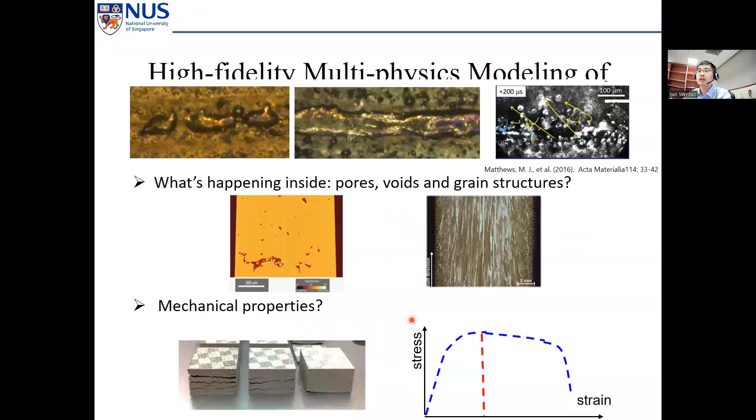The questions we want to answer through multi-physics modeling include what's happening outside, like powder motion and surface roughness, and what's happening inside, like pores, voids, and grain structures, and ultimately, what are the mechanical properties.

Correspondingly, we have developed a series of models, like multi-scale modeling of melting processes, powder dynamics models, grain evolution models, and then we integrated the process structure property models together. Our contributions lie in developing a complete simulation chain of manufacturing, microstructure, property relationships.

The focus today will be on the molten pool dynamics model, including how it's linked with the DEM model of powder spreading, the physics-based heat source models, the composition-dependent evaporation model, effects of external magnetic field, effect of ultrasound, and also I will talk a little bit about the multi-material melting model.

I will also talk about our work on microstructure evolution models from grain growth to dendrite growth, and also multi-scale thermal stress models from meso-scale to microscale.

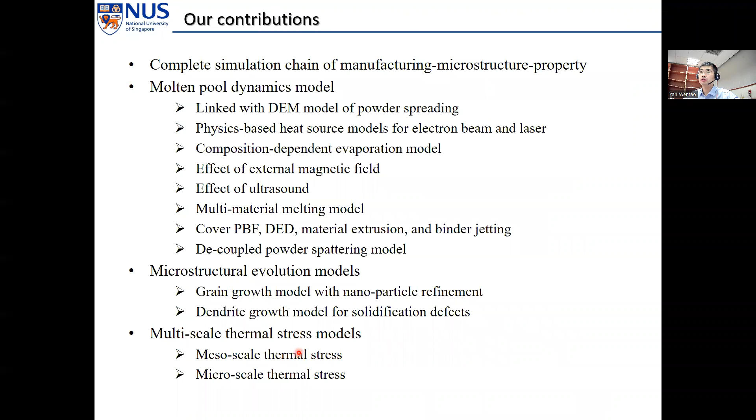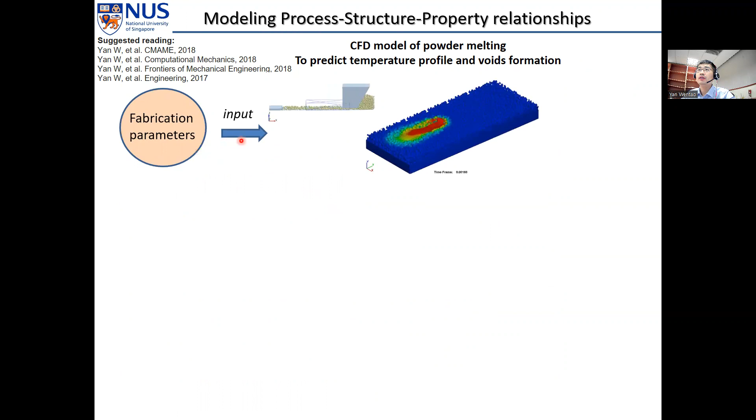The overall framework is like this. When we get the fabrication parameters, we use the powder spreading model and powder melting model to simulate the manufacturing process so that we can predict the temperature profile and void formation.

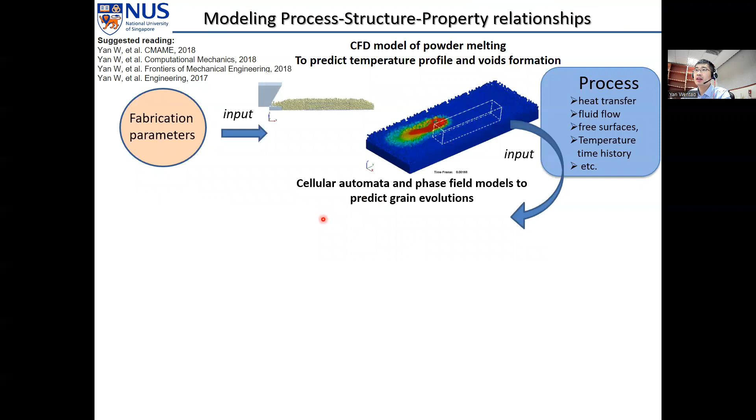Then we input into the cellular automaton and phase field models to predict microstructure evolutions. Further, we can use the crystal plasticity model to predict the mechanical properties and thermal stresses.

With that, we can replace most of the trial and error experiments and accelerate the R&D process.

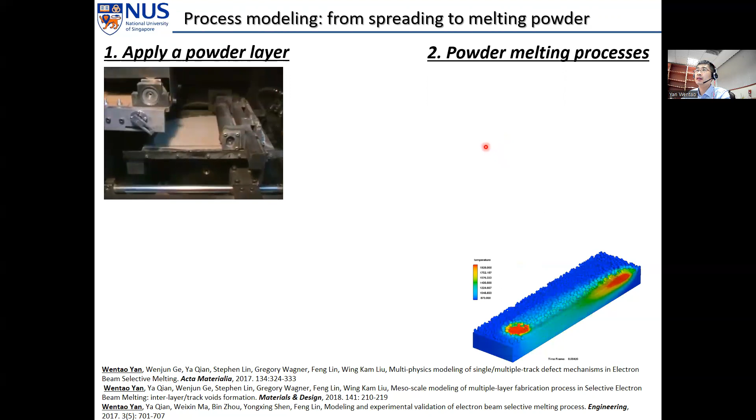For the manufacturing process, there are two major procedures. First is applying a powder layer, second is the powder melting process. Correspondingly, we built two models for powder spreading using the discrete element method and powder melting using computational fluid dynamics.

In the powder spreading model, we include elastic and inelastic collisions, friction, gravity, and also van der Waals force, and we can investigate the influence of the rake shape, speed, layer thickness, and powder size distribution.

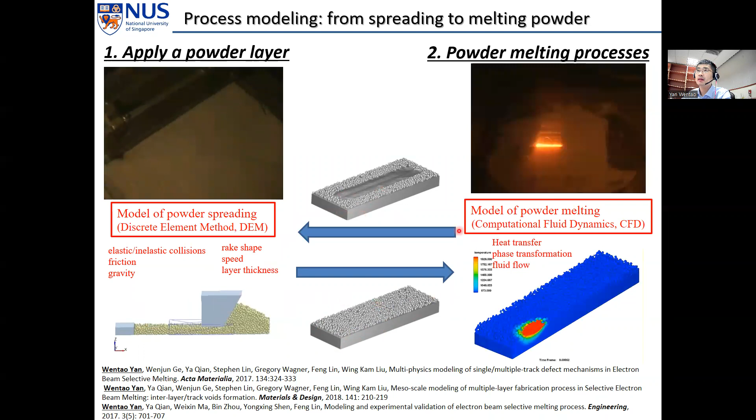With this model, we can get the configuration of the powder bed and implement it into the powder melting model to simulate the powder melting process, which can simulate the solidified geometry. Then we repeat these processes by coupling these two models together, reproducing what's going on in the real experiments.

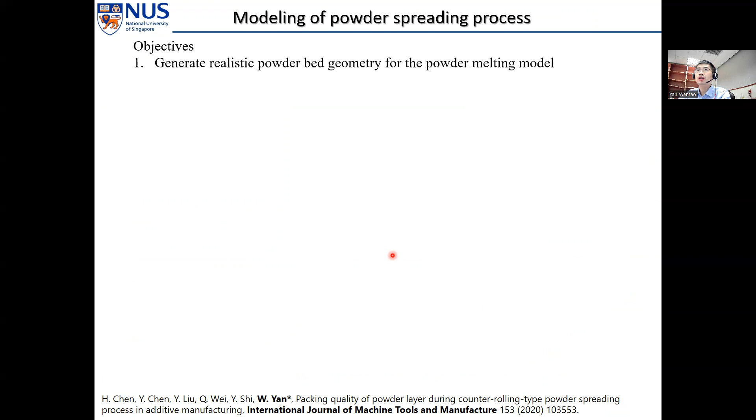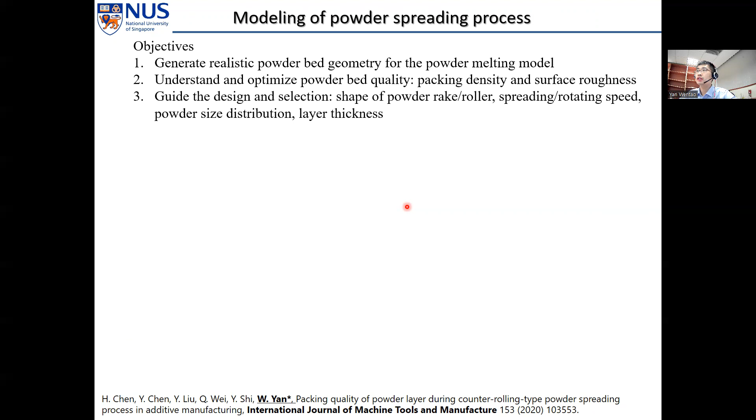For the powder spreading model, in addition to generating realistic powder bed geometry, we can also use this model to better understand and optimize the powder bed quality, like packing density and surface roughness, and provide guidance for the design and selection of parameters, like the shape of the powder rake or roller, spreading or rotating speed, powder size distribution, and layer thickness.

There are mainly two types of powder spreading machines. The first is rake type, where the rake translates over the powder bed. Another is roller type powder spreading, where the roller is rotating and translating. We have done extensive experiments to validate these models.

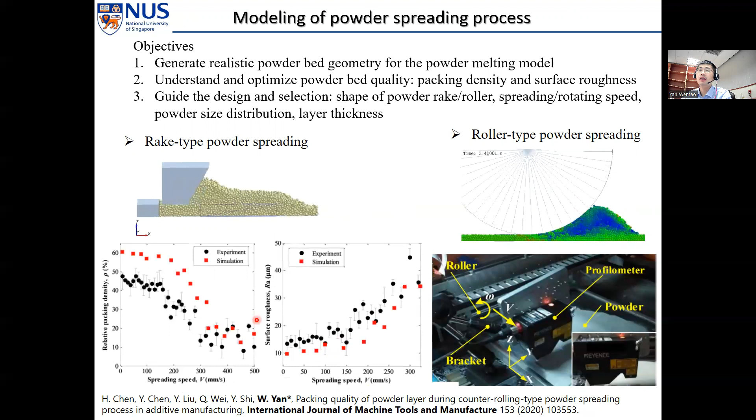For the roller type powder spreading, we add a profilometer here so that after powder spreading, we can in situ measure the surface configuration of the powder bed to evaluate the surface roughness. After this process, we can collect the powder and measure the relative packing density of the powder bed, and then do quantitative comparison with the simulation.

For the powder melting model, another very important factor is the heat source. Traditionally, a lot of heat source models are based on assumptions and simplifications, but here, to improve the accuracy and fidelity, we get this heat source model directly from fundamental physics.

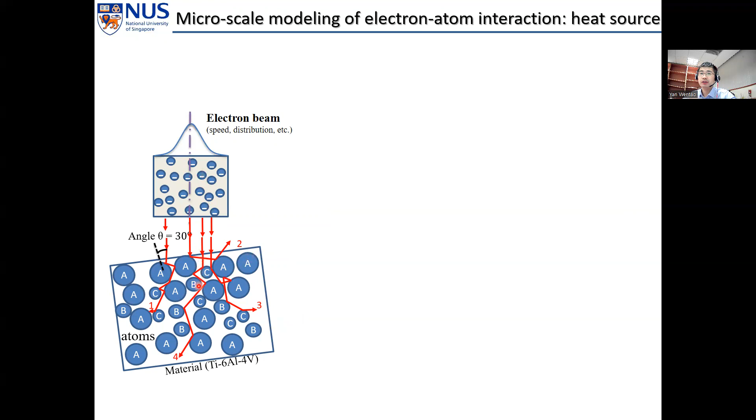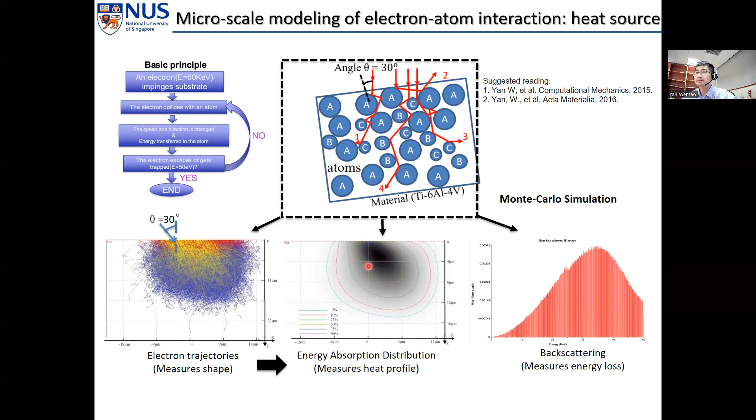For electron beam, it's the interaction between free electrons and material atoms. We use the Monte Carlo method to simulate millions of free electrons impinging into the materials and colliding with different atoms. During the process, we check the trajectories of the free electrons and also record the energy transfer between them, so that we can get a physically informed heat source model, including the distribution in the cross-section, the energy distribution along the penetration depth, and the energy absorptivity.

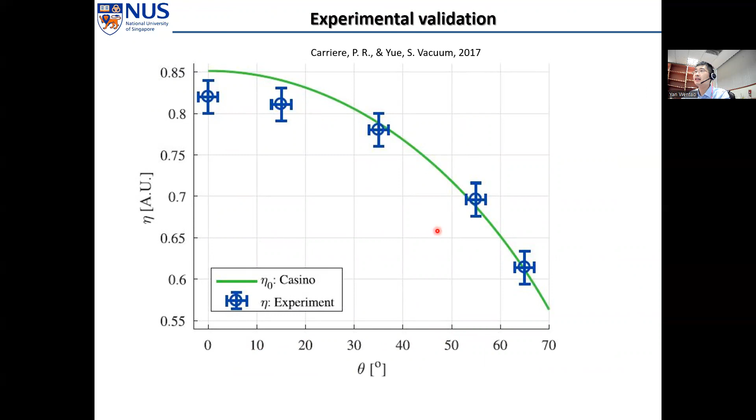One group in Canada used the same model as us and did some experimental validation. You can see at different incidence angles, the energy absorptivity is very close to the simulation, which demonstrates the validity of the model. The next question is how to do multi-scale modeling by implementing the micro-scale simulation into meso-scale or powder-scale simulation for the powder melting process.

First, in the powder melting process, we reconstruct the free surfaces based on the VOF method, and then we apply our heat source model by dividing the electron beam into a number of sub-beams with varied energy. For each sub-beam, the penetration starts from the surface, and the energy absorptivity is different for different sub-beams depending on the incidence angle.

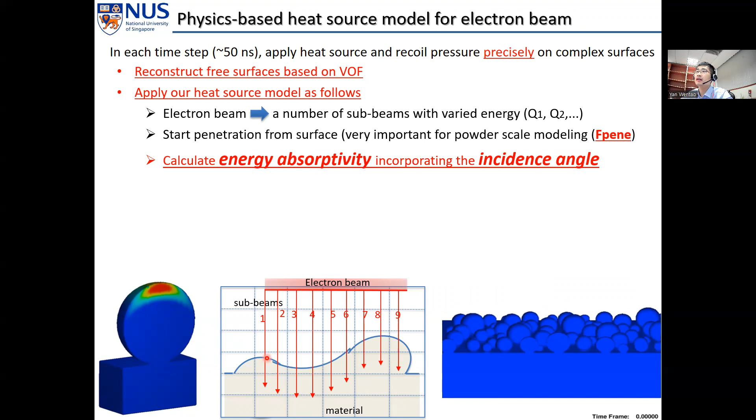And also the energy distribution along the penetration distance is applied based on the micro-scale model. We can also apply recoil pressure and evaporation on the reconstructed surface, which is temperature dependent and composition dependent. After this, we update the free surface at the end of each time step.

So this is a showcase. We assume it's a uniform distribution in the cross-section of the electron beam, incidence on the spherical particle. You can see the incidence angle is 0 here in the center and becomes larger and larger toward the edges. So the energy absorptivity is highest in the center and becomes lower and lower toward the edges.

That's the reason why the particle gets melted in the center first and then the edges. And for commonly seen Gaussian distributed electron beams, if the power is high enough, the recoil pressure will be dominant, so that you can see keyhole formation.

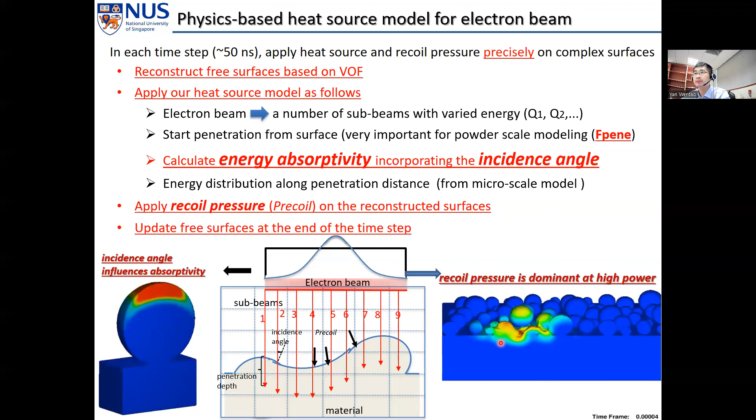And for laser, the heat source will be totally different, because for laser there will be multiple reflection since the energy absorption for each interaction is much lower. So we consider this heat source model using the ray tracing method to track the multiple reflection.

For each reflection, the energy absorptivity is calculated based on the Fresnel equation, which is essentially derived from the Maxwell equation. We can consider the energy absorptivity for different materials with different wavelengths and polarization, and the influence of incident angle is also considered.

And this is a verification case. We assume a laser coming from here, and you can see the simulation results like here. You can see the trajectory of the laser is the same as expected.

And also the first irradiation spot gets melted, and then the second one you can see obvious temperature rise, and the third one you can see the temperature rise but lower, and the fourth one you can barely see the temperature rise. This is due to the energy of the laser becoming lower and lower, which demonstrates the validity of our implementation of the heat source model.

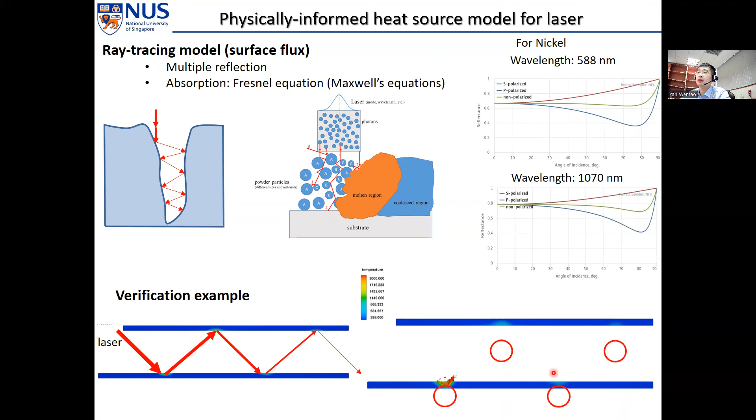With that, we can simulate the very common phenomena like how non-uniform tracks or balling effects happen, and we can reveal the fundamental physical mechanisms, which is actually mainly driven by the surface tension. But essentially, it's influenced or determined by the energy density.

And we also do quantitative validation in collaboration with the US National Institute of Standards and Technology. So, to scan a single track, there are actually different scan strategies.

One scan strategy is called exact stop, which means we turn on the laser and start laser scanning at the same time. But the laser scanning is controlled by a galvo mirror, which is a mechanical system, so there has to be acceleration and deceleration stages.

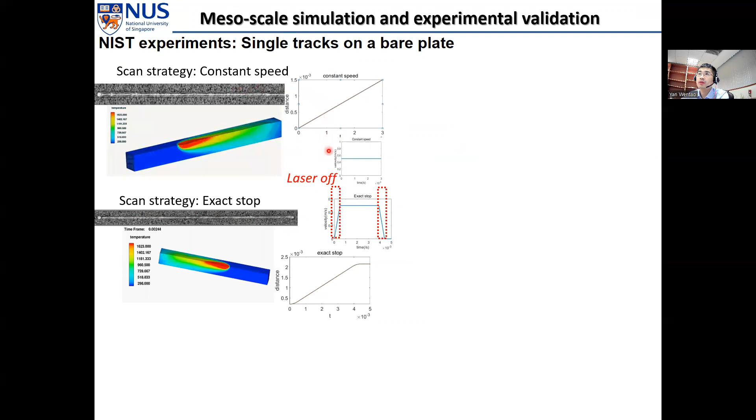In these acceleration and deceleration stages, the energy density will be different from the constant speed stage. So another strategy, called exact stop, is where we just turn off the laser during the acceleration and deceleration stages. Another scan strategy called continuous scan is where we just change the laser scan direction at the beginning and ending.

So the blue lines here are the experimental results, showing the surface elevation along the track. And the black lines are the simulation results. You can see the surface elevation is around 10 micrometers at the peak in the beginning, and around 10 to 15 micrometers at the end.

This is due to the Marangoni effect. Our simulation can well reproduce the peak and valley, and quantitatively, the absolute error between simulation and experiments is within 2 micrometers, since our simulation mesh is about 4 micrometers.

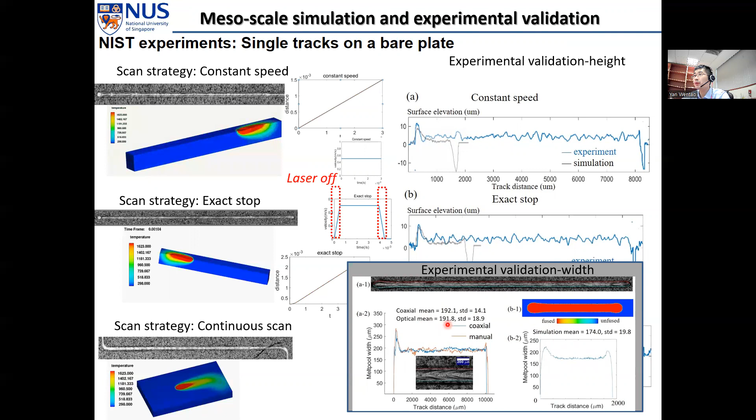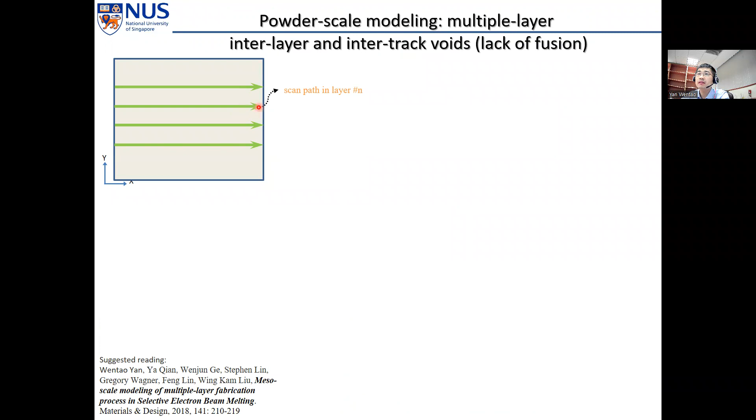And for more complex cases, like multiple layers and multiple tracks, this shows how interlayer and intertrack voids will be formed. No matter what the scan path is in experiments, in one layer and the next layer it will rotate a certain angle, which we can well reproduce in our simulation.

And this is a free surface view. Here you can see the formation process of the lack-of-fusion voids. The shape, size, and spatial distribution of these lack-of-fusion voids all agree well with our experiments.

And if it's for laser powder bed fusion, mostly it's keyhole mode, and for keyhole mode the evaporation is very serious. But traditional models didn't consider the compositions. So here we develop our own composition-dependent evaporation model based on the Maxwell equation distribution for molecule distribution, Boltzmann equation for molecule collision, and also boundary conditions where we consider the compositions.

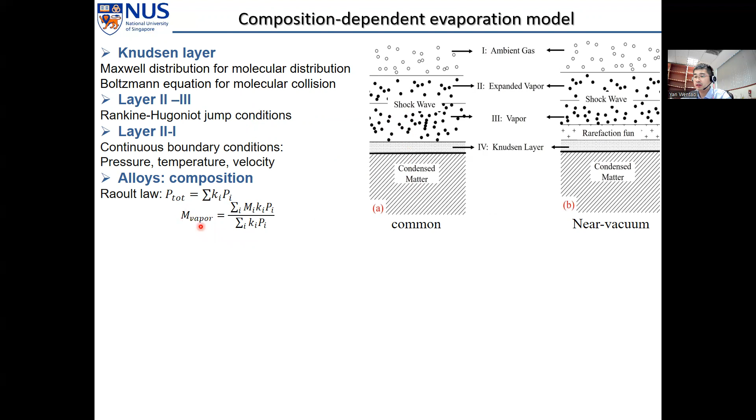We validate our model against the in situ X-ray imaging results by Argonne National Lab. You can see this is the simulation results using our own evaporation model, and this is a traditional evaporation model developed by Anisimov in the 1970s. You can see the difference in the development of the keyhole. Our simulation is closer to the experiments because the recoil force is different. Basically, our evaporation model is physically more rigorous and has wider application to different materials and different ambient pressure, and also better accuracy.

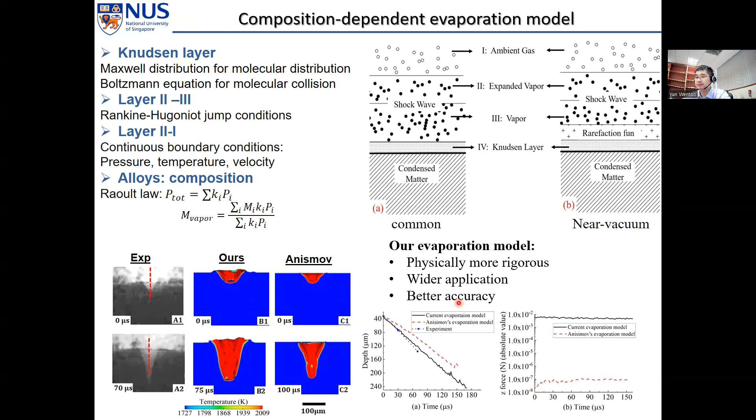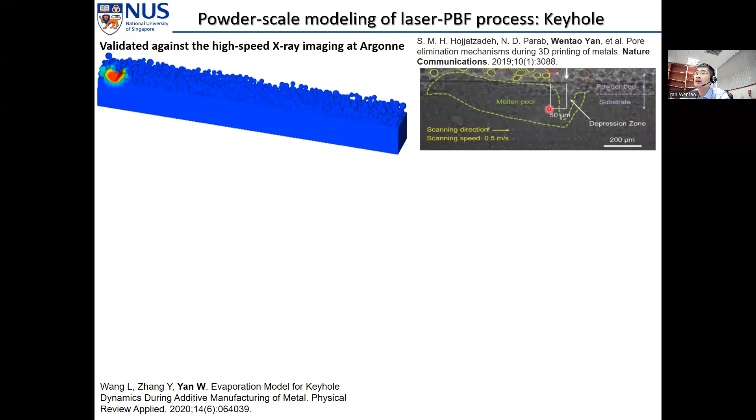This is the laser scanning cases. In collaboration with Argonne National Lab, we also simulate this, and you can see the keyhole size and shape and the molten pool shape and size all agree well between the simulation and experiments. But more importantly, we can provide some information that can hardly be measured even at Argonne.

That is the energy absorptivity at different locations. You can see the energy absorptivity at different locations is fluctuating all the time because they are directly related to the keyhole shape. When the keyhole is shallow, the energy absorptivity is low because there will be fewer laser reflections. When the keyhole depth is larger, the energy absorptivity will become larger because there will be more reflections within the keyhole. Even for the same laser power and same powder bed, but with different scan speed, or the same scan speed with different power, the energy absorptivity can be different.

You can see our simulation agrees well with the experiments, both for the depth and inclination angle. More importantly, we can show the energy absorptivity. Actually, they are influenced by the laser power and the scan speed.

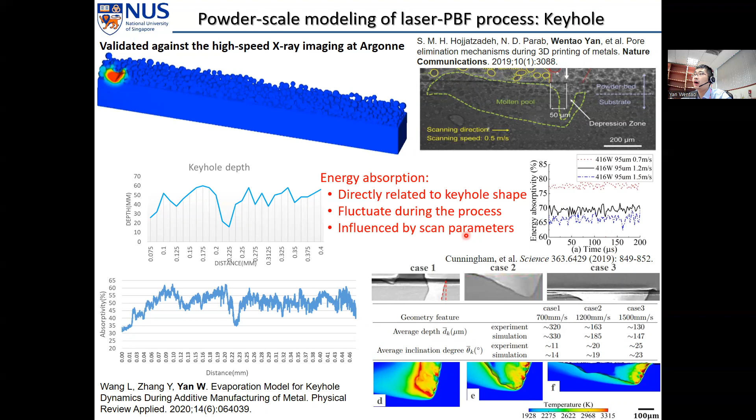Furthermore, we can simulate the keyhole pore formation. In the X-ray imaging results by Argonne National Lab, they observe 3 different stages for the keyhole pore formation, and our simulation exactly reproduces these 3 stages.

The first stage is a protrusion process where it forms a new keyhole, called the newborn keyhole, and this newborn keyhole will close the previous keyhole. So this part, the laser cannot reach, and then the energy will be reduced. So there will be a collapse, a keyhole collapse here, and then it forms a keyhole pore.

Besides this, we can further reveal the driving force, which is actually the recoil pressure, and this recoil pressure is driven by the energy. You can see the rear keyhole will absorb more energy, but the fluctuation is also larger, so it leads to larger fluctuation of the rear keyhole wall, which leads to keyhole pore formation.

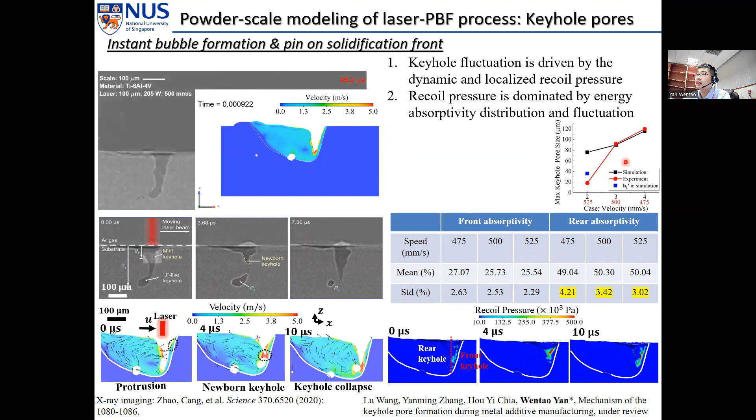For the keyhole pore size, it also agrees well between our simulation and experiments. You can see this is around the threshold value for keyhole pore formation, and it's very sensitive to the input energy in this area.

The next question is, how can we eliminate the keyhole pore or manipulate the molten flow? One popular approach is to add an external magnetic field, and it has proven very effective in experiments, but the understanding of how it works is still lacking.

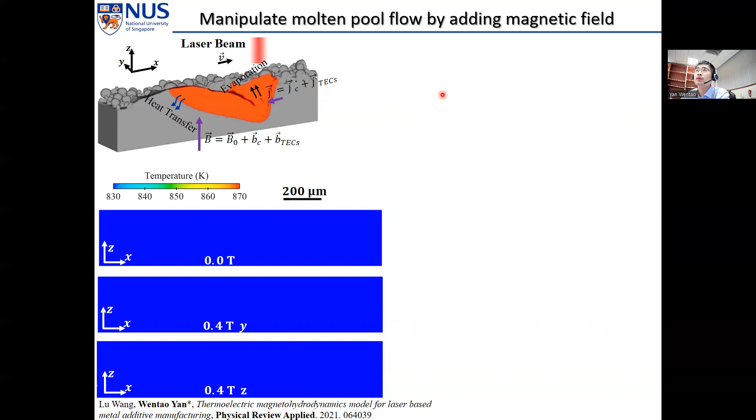So here we developed our model to incorporate the effect of magnetic field by incorporating Ohm's law, Seebeck effects, and then the Lorentz force within the molten pool. We simulate different cases: without magnetic field, 0.4 Tesla around the y direction, and 0.4 Tesla around the z direction.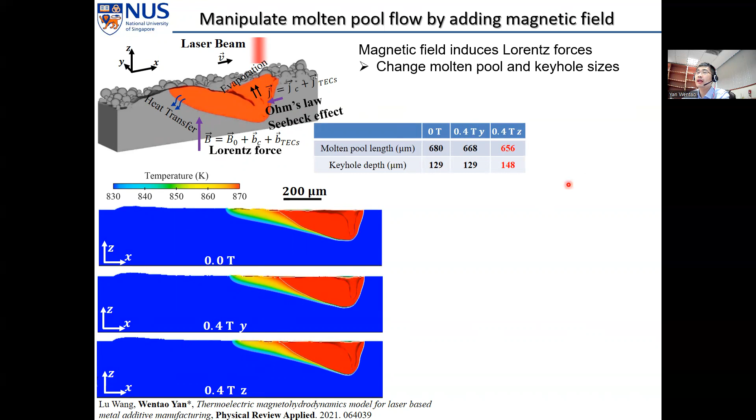You can see the molten pool length will be influenced by the magnetic field, as well as the keyhole depth, but this is not so significant. What's significant is the molten flow patterns. You can see without magnetic field, there are two vortices in the molten pool: one near the keyhole, another in the rear part of the molten pool.

With these two vortices, when a keyhole pore forms in this area, it cannot escape because this vortex will keep circulating the pore within the keyhole. But when we add an external magnetic field, we can eliminate this vortex in the rear part of the molten pool, so when a keyhole pore is formed here, it can escape due to this flow pattern in the rear part of the molten pool.

Also, the Lorentz force near the molten pool boundary is strong enough to meet the criteria that experimentalists found in experiments, which can potentially refine the grains.

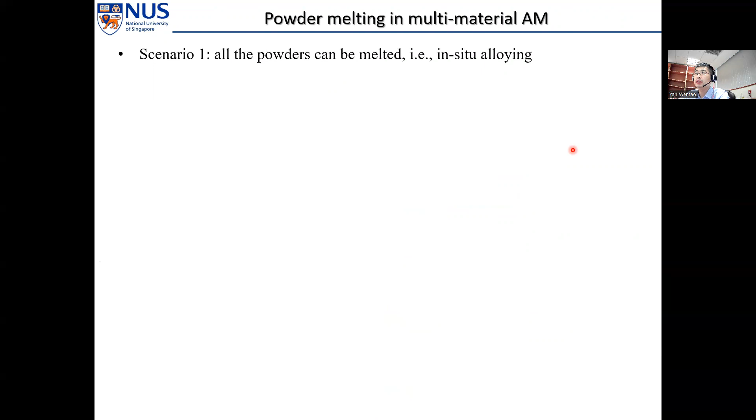For the powder melting in multi-material additive manufacturing, which is very promising in material design, there are two scenarios based on our consideration. One is all the powders are melted, which is actually in situ alloying.

There are a few physical phenomena influencing the chemical composition that should be considered. One is convection, but diffusion is usually minor, along with rapid melting and solidification. Elemental mass loss due to evaporation is also serious.

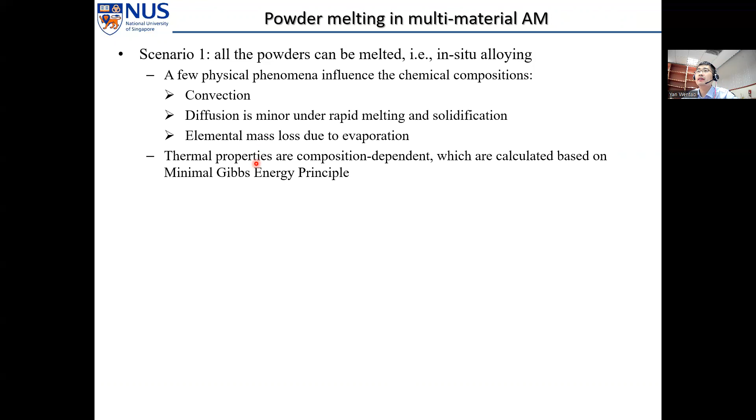Another important factor is the thermal properties, which are composition dependent and should be calculated.

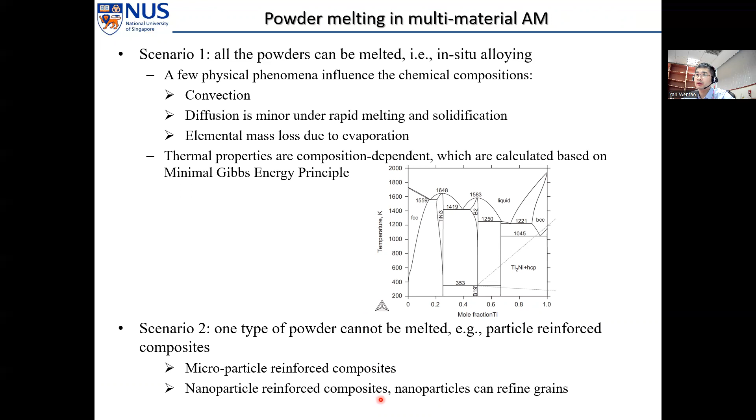When we actually couple the CalPhaD approach with our model, another scenario is one type of powder that cannot be melted, like particle reinforced composites. Based on particle size, it can be microparticle or nanoparticle reinforced composites, and nanoparticles can refine grains. So we'll talk a little about work on this.

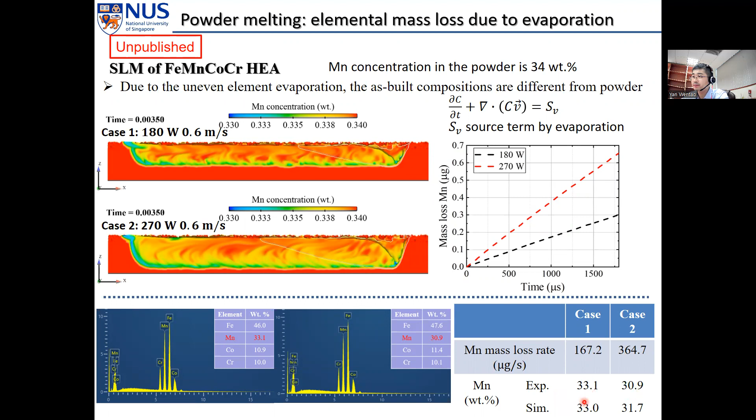This is one example: a very complex high entropy alloy where the manganese concentration in the powder is around 34 weight%. With different laser melting parameters, we can see this concentration varies with location and manufacturing parameters, because manganese has a different evaporation rate than other chemical elements. These are experimental results, and you can see the as-built part with different manufacturing parameters has different manganese concentrations. Our simulation agrees pretty well with the experimental results.

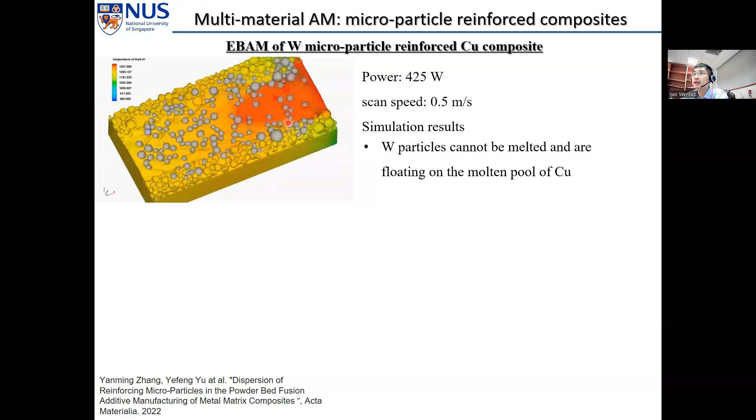Another scenario is particle reinforced composites. This is one example of microparticle tungsten reinforced copper composites. The gray particles are the tungsten particles - they cannot be melted, while the copper matrix can be melted. You can see all these tungsten particles are floating on the surface of the molten pool, and just a few tungsten particles can submerge into the molten pool.

This is experimental validation. In single tracks, these tungsten particles are mostly on the surface, and they are not uniformly dispersed.

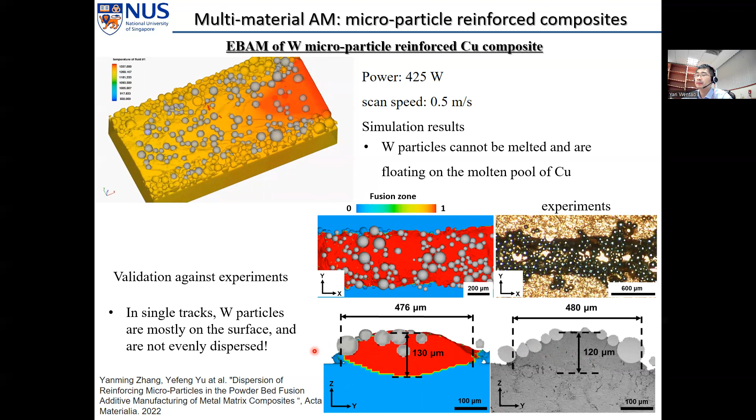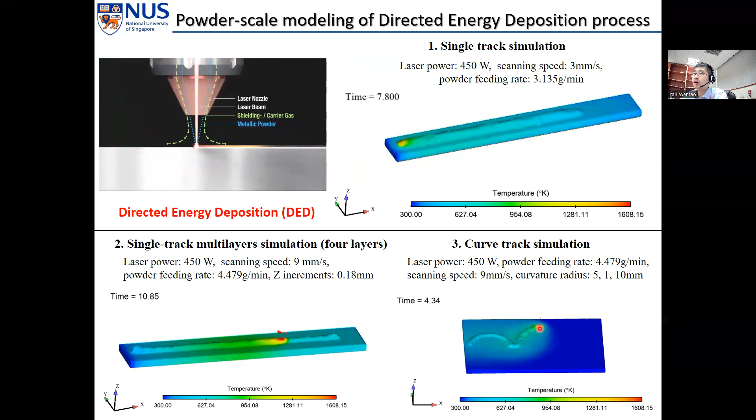In addition to the powder bed fusion process, we also have models for directed energy deposition. No matter if it's a single track or multi-layer, multi-track, straight or curved track, we can easily reproduce it in our simulation. A popular way to manipulate the molten pool flow, grain structure, and mechanical property in this DED process is to add ultrasound.

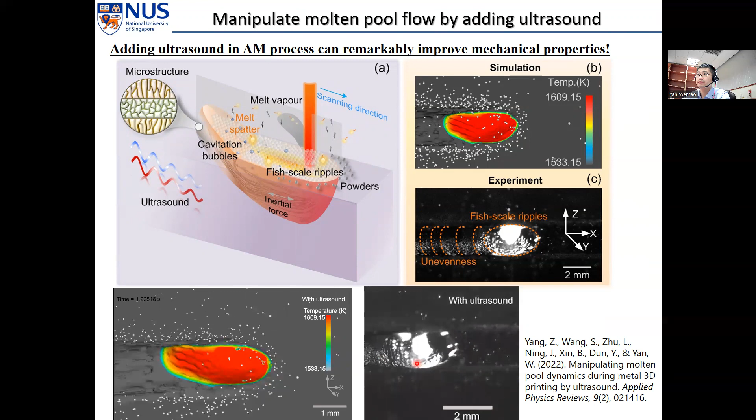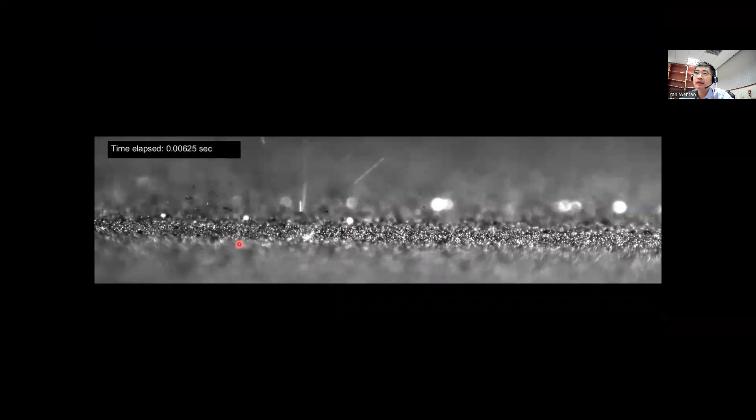In powder bed fusion, there's another important phenomenon called powder spattering and denudation. During laser scanning, the laser blows up some of the powder, which is also moving all the time. So we build a multi-phase flow model to reproduce this phenomenon.

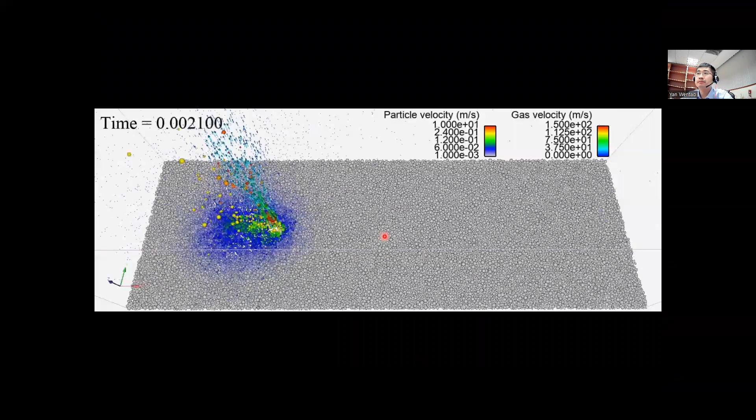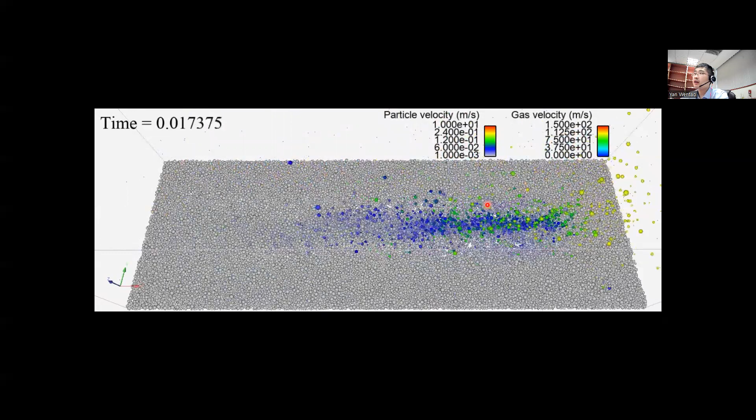You can see we decoupled the multi-phase flow model - we just consider the vapor jet and its interactions with ambient gas and the powder particles. Our simulation results reproduce these experimental observations. But more importantly, our model can provide more information that cannot be measured in experiments, such as ambient gas velocity, temperature, and the particle velocity and temperature.

In experiments, when we use different manufacturing parameters, there will be different behaviors of powder spattering and denudation, and we can reproduce this in our simulations.

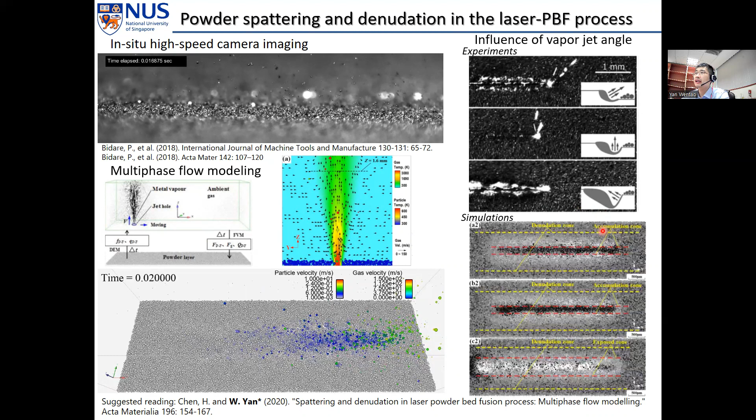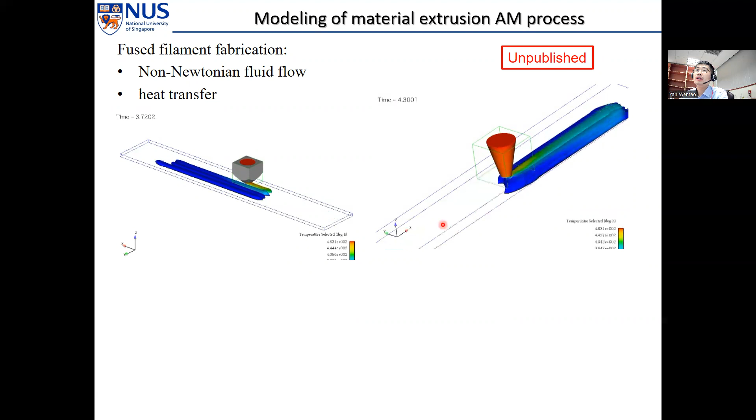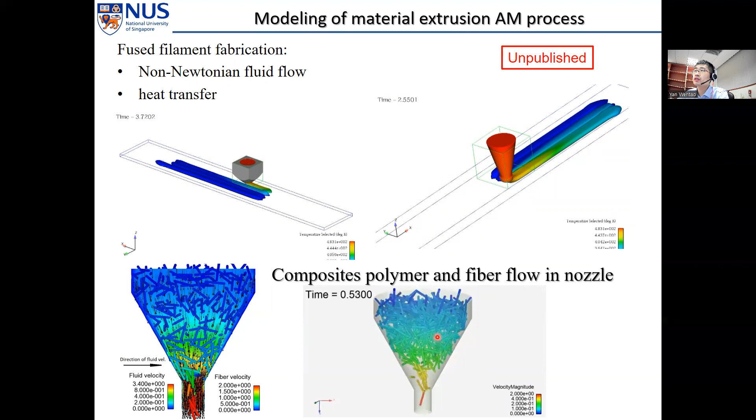For other additive manufacturing processes like material extrusion AM, such as fused filament fabrication, where non-Newtonian fluid flow and heat transfer are incorporated, we can simulate this in our model. Even when it's not just polymer flow but has reinforcing short fibers inside, we can also simulate their interactions and the heat exchange between them, so that we can predict the orientation and distribution of the short fiber in the as-built part.

Another very popular AM process is binder jetting. It's even more complex, including fluid flow, heat transfer, fluid-particle interactions, and particle-particle interactions. We can reproduce all the phenomena like binder wetting and spreading, as well as powder spattering and agglomeration. This is validated against high-speed X-ray imaging at Argonne National Lab - the average particle spattering velocity is pretty close, and the spattering velocity distribution is also similar.

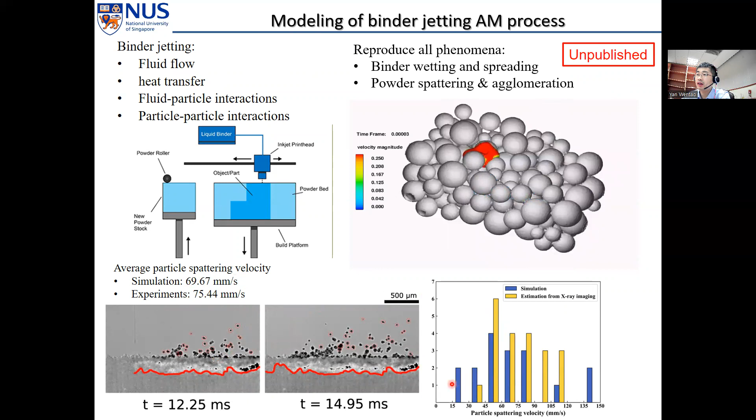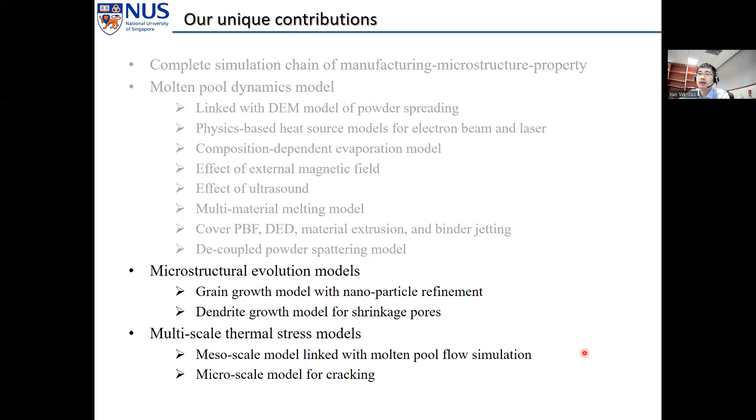Furthermore, we explore microstructure evolution and thermal stress. The idea is simple: we implement the temperature profile from the powder melting model into the grain growth model. Our unique contribution is that we comprehensively incorporate a classic nucleation model, where these pink dots are the possible nucleation sites, and we implicitly track them so that we can consider nucleation rather than pre-assigning nucleation seeds.

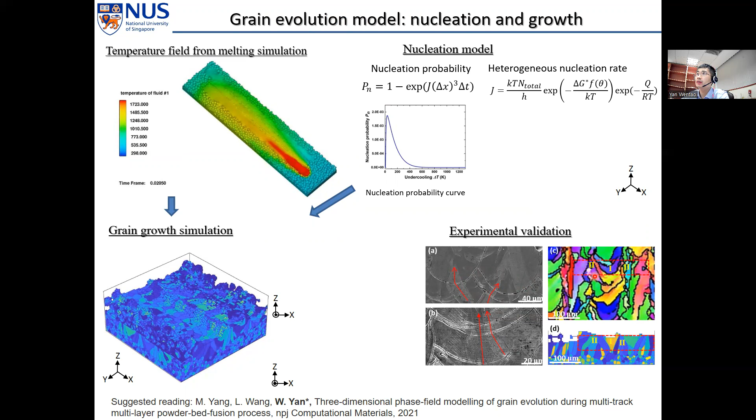These are experimental validations - the grain morphology and size all agree well with the experiments. Furthermore, to refine the grains, experimentalists like to add nanoparticles inside. And how can nanoparticles refine the grains?

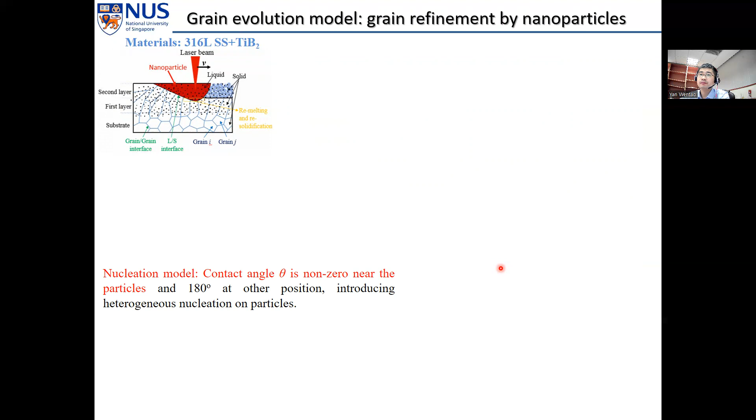So there are actually two effects. One is in the nucleation, they can introduce more nucleation sites. Second is during the grain growth, they can slow down the grain boundary movement, slowing the grain growth. This is called the Zener-Pinning effect. So we incorporate both effects in our simulation, and then compare with experiments.

When there's no nanoparticle, you can see it's mostly columnar grain. With addition of nanoparticles, it's short columnar grain at the boundary and equiaxed grains in the middle. This agrees well with experimental results in literature. We also compare quantitatively on the grain aspect ratio and grain size.

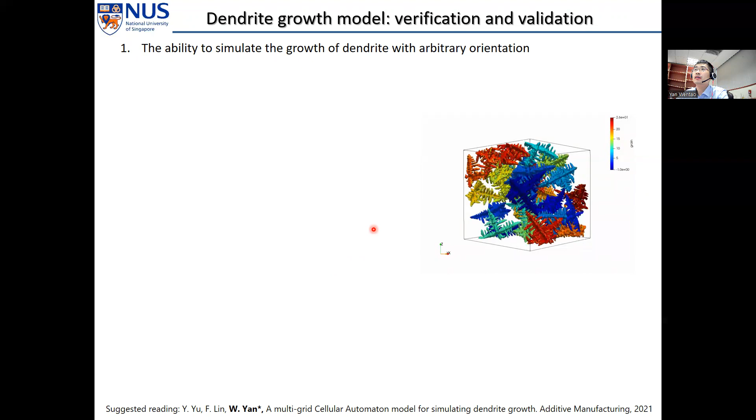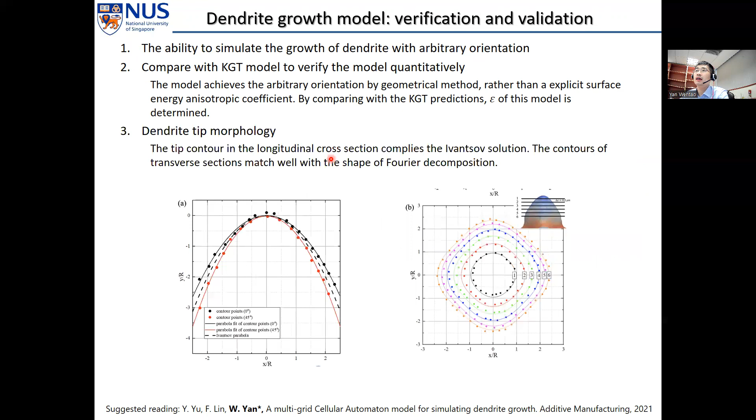But for an even smaller scale, the dendrite scale, that's where solidification defects happen. So to do that, we develop a new model to simulate dendrite growth with arbitrary orientations. Then we compare this model against classical models like the KGT model and LGK model, and compare with X-ray imaging results for a simple casting case.

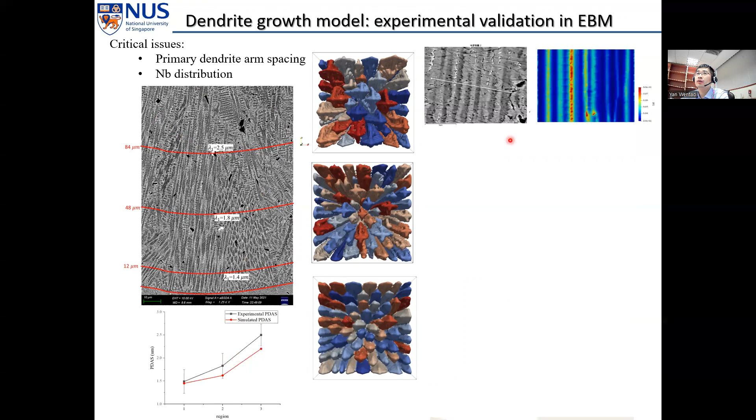But this is still insufficient for validation, because in casting the cooling rate and temperature gradient are much smaller than in additive manufacturing. So we further validate our model against electron beam additive manufacturing experiments. In different locations, the cooling rate and temperature gradients are different, so we extract the thermal conditions for the dendrite growth simulation, then validate in terms of primary dendrite arm spacing and solute distribution across the dendrites. They agree well.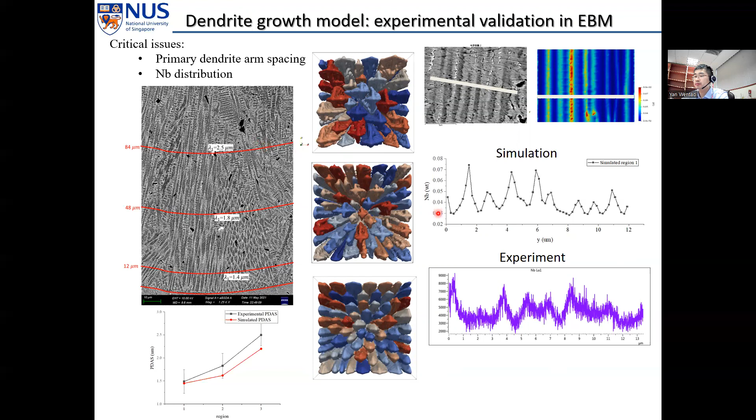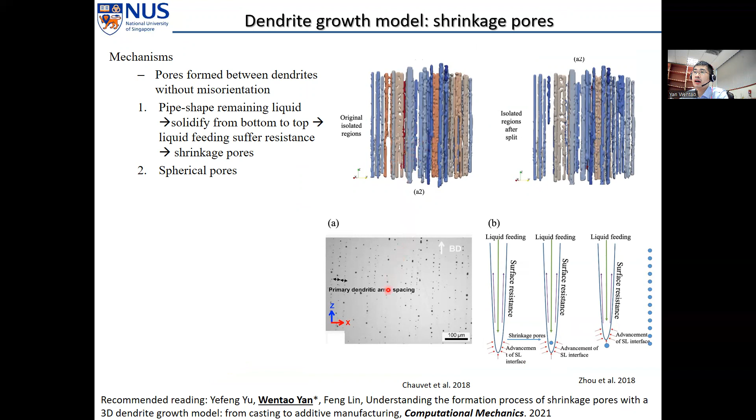Furthermore, based on the dendrite growth model, we can indicate how shrinkage pores are formed. There are actually two types of formation mechanisms. One is where there is no misorientation, so all the shrinkage pores are regularly distributed and their shape is spherical.

In another scenario there is misorientation between dendrites, so these shrinkage pores have irregular shape and are also irregularly distributed, and they appear with solute-rich precipitates.

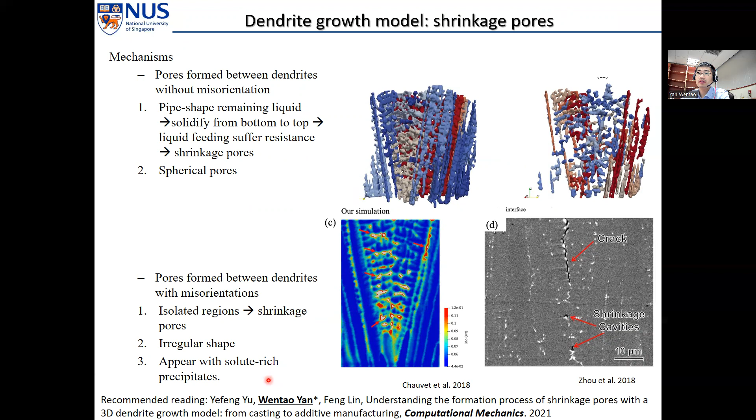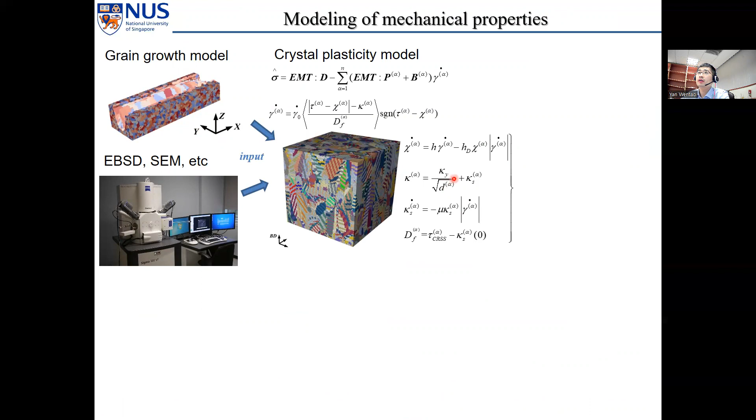Furthermore, with the microstructure model, we can, from either the grain growth model or experimental data, construct the microstructure geometry and use a crystal plasticity model to simulate the mechanical behavior and do experimental validation.

But here, what I want to show is the importance of residual stress. You can see during tension and compression tests for the same batch of samples, the yield stress has a difference of around 400 megapascals for this titanium sample, which is very significant.

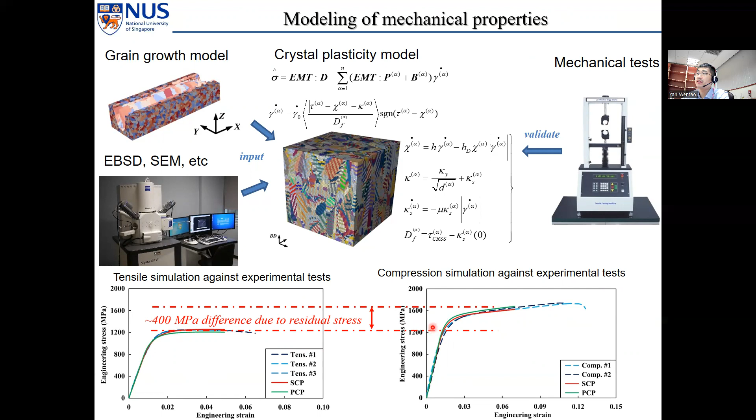This is due to the large residual stress in additive manufacturing. To simulate this, we input the temperature profiles from the thermal fluid flow simulation results into a finite element solver to implement the accurate temperature profile and realistic geometry, including voids and rough surfaces, so we can improve the prediction accuracy of thermal stress and deformation.

In comparison, this is a conventional thermal stress model where the surfaces are perfectly flat and the temperature profile is not so accurate. Then the accuracy may be relatively poor.

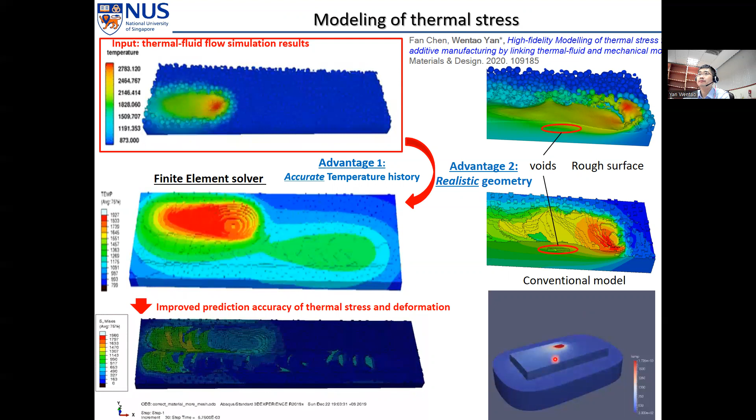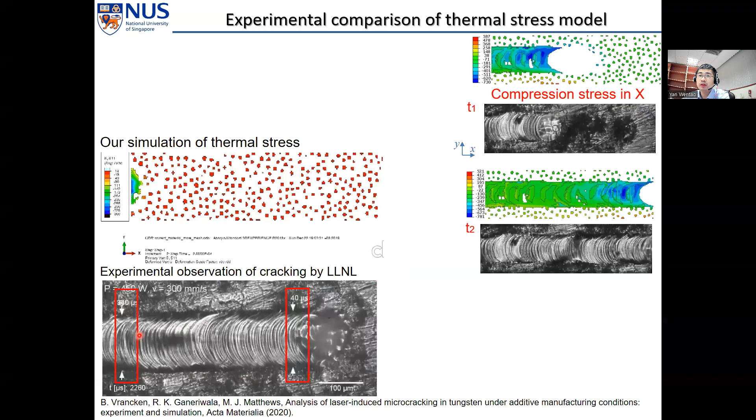With this, we can very well explain the experimental observation of how cracking happens. When the laser just passed by, there's no cracking, because it's compression stress. When it goes further, it's still compressive stress. But when it goes even further and cools down further, there will be cracks here. This is because, one, the thermal stress becomes tension; second, due to the rough surfaces, there's stress concentration, which leads to cracking.

But this is just a qualitative comparison. For quantitative comparison, it's still very difficult.

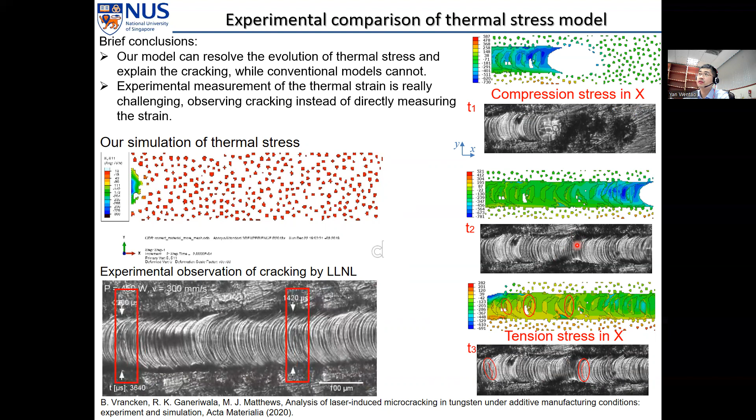And at an even smaller scale, the grain scale, the thermal stress or residual stress actually varies across different grains. This is the origin of micro cracks.

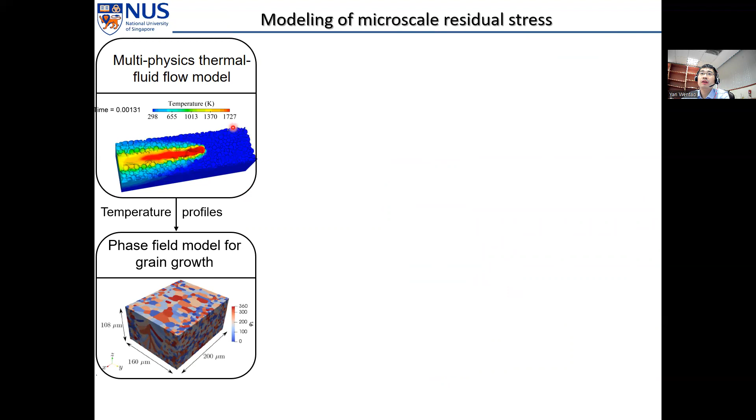To address this challenge, we implement both the temperature profile and grain structure into a crystal plasticity model to simulate the micro-scale residual stress. We also consider the cooling process where the thermal stress is relaxed into residual stress, and compare with experimental results in literature.

So that's pretty much all of the high fidelity models. You can see they have high fidelity, high accuracy, but also high computing cost.

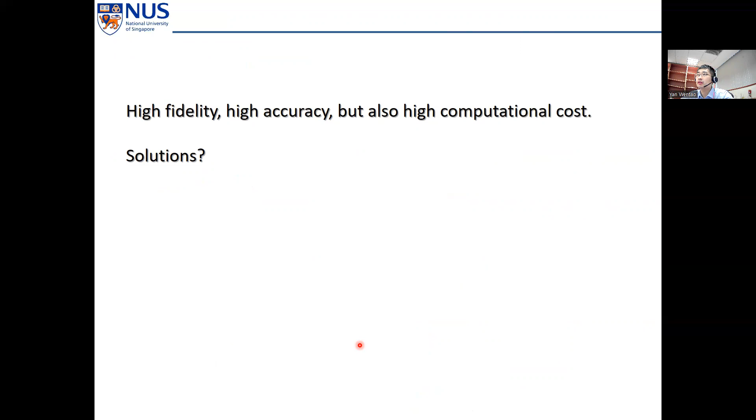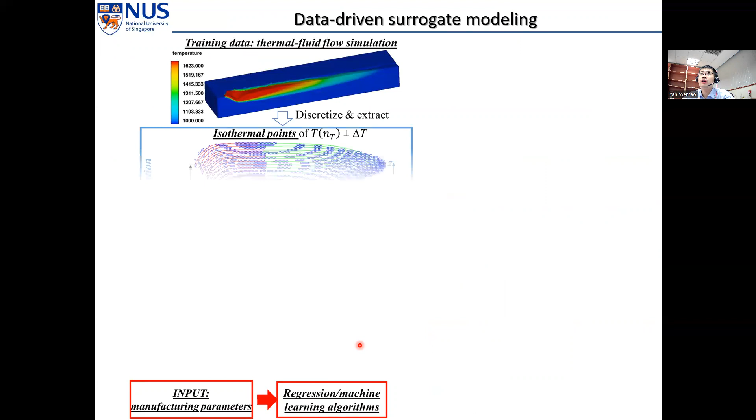So what's the solution? I think the solution is data-driven surrogate modeling. This is just one example: we can use the high fidelity model as training data, then use machine learning or regression algorithms to develop surrogate models, so we can further implement this temperature profile into different subsequent models.

This model will accelerate or reduce the computing cost by at least 99%. And for this, we can also accelerate it, reducing the computing cost by at least 90%.